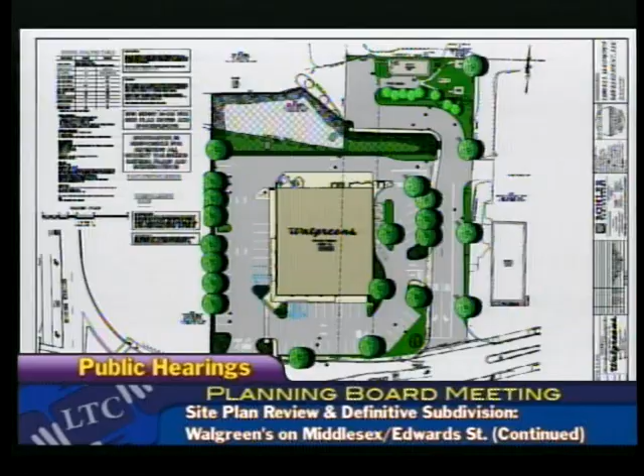Just to walk through some of the elements that Attorney Flood had pointed out: the building itself, the 14,800 square foot Walgreens, is located in the middle of the site. The drive-through is located to the east side right here. The front entrance to the building is located here.

Relocated Edward Street is here. You can make out the former limits of Edwards right through there. As mentioned, this parcel will include roughly 1.6 acres of land. There's 61 proposed parking spaces here.

The on-site improvements include providing loading facilities to the rear of the store. The parking surrounds the perimeter of the site, as you can see. We've provided ample interior and perimeter landscaping in accordance with the bylaw.

The driveways are proposed to be a right-in, right-out off of Middlesex here, and then two full movement driveways, one here at the intersection of the relocated Edwards. The site lighting will be shoebox-style downward directed fixtures to contain lighting on site.

The 35 Edward Street is to remain, located right here. Soccer field parking is located here, and the soccer fields would be just due north of the site there. To our west is state-owned land at Rourke Bridge. To our east is additional commercial development.

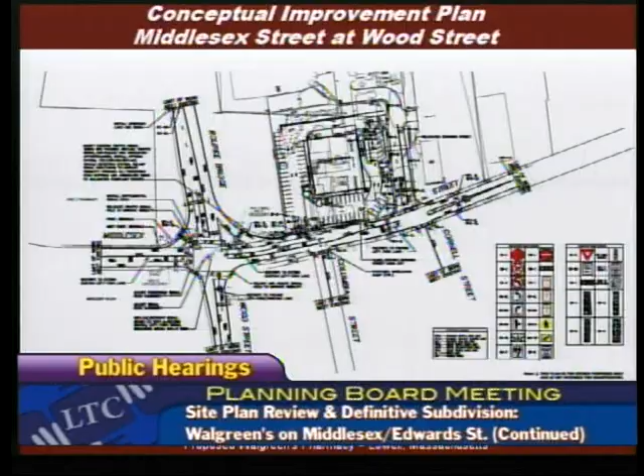Now we'll talk about the improvement plan. There have been a lot of changes made since the last time we were here, to address not only the questions and concerns that were raised, but also because we've since had the opportunity of a peer review done by the city traffic engineer as well as an outside review consultant. We've taken those comments and addressed them as part of the updated concept plan, looking at the site itself and how circulation works, specifically the access points of the property.

We spent a lot of time talking about the Middlesex Street driveway and how that would work, as well as the driveways on Edward Street, in particular the southernmost driveway that's closest to Middlesex Street. Part of the handout I have, the larger size plans I presented to you, will be a lot clearer than what's shown on the slide here.

On the first page of the larger set of plans, I've highlighted in yellow where the existing curb line is on Middlesex Street. The plans were difficult to read last time in terms of understanding where the widening was actually taking place, so I've highlighted the existing curb line, and right in the middle of that highlight you'll see a black line — that's the existing curb line.

In terms of the refinements we've made, we have extended the widening that was going to take place on Middlesex Street past the project site itself. So in the location closest to the Middlesex Street driveway, we're actually moving that curb line about 5 to 6 feet into the project site — it's a significant widening.

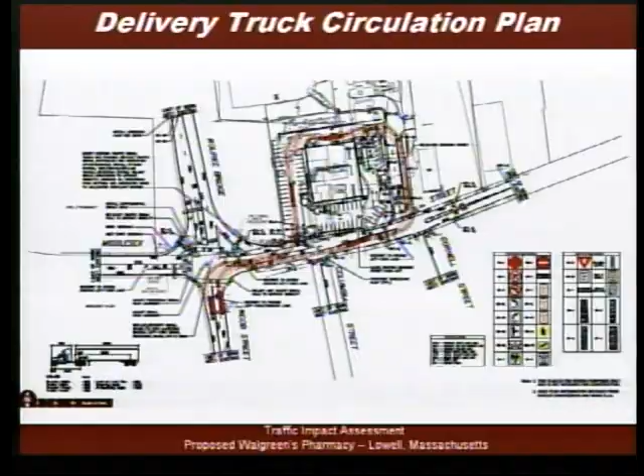For that truck to circulate within the site, it's going to be coming from Route 3, from Drum Hill, traveling up from Wood Street. It'll make a right turn at the intersection, shown on the second page in the larger set of slides. So the truck comes up Wood Street, makes a right-hand turn onto Middlesex Street, gets into the left turn pocket we're creating, turns left, goes down Edward Street, and comes into the back of the site at the northern driveway.

The truck will progress back past the back of the building and maneuvers into the loading dock area, then offloads pallets into the store. We've shown on the slide that the truck fits within the loading dock area. It does not impede circulation around the building, so the truck can be stopped here and offload product while you still have over 20 feet of traveled way behind the building.

The truck then proceeds around the building in a counterclockwise direction and needs to exit by way of this driveway. That large truck cannot circumnavigate the building, so it cannot come back out Edward Street—it needs to come out by way of the Middlesex Street driveway, then proceed back onto Middlesex Street. The truck will be coming at off-peak hours, a commitment we have as part of the project, so when it comes out it will get into the left turn lane and proceed south along Wood Street to get back onto Route 3A, Route 3. That is the only circulation pattern that works for the site in terms of that large tractor trailer truck.

Walgreens will not be using a smaller size delivery vehicle typical of urban areas. So that's one of the primary reasons why we need to maintain this access, because that's the only way that truck can actually get in and out of the site.

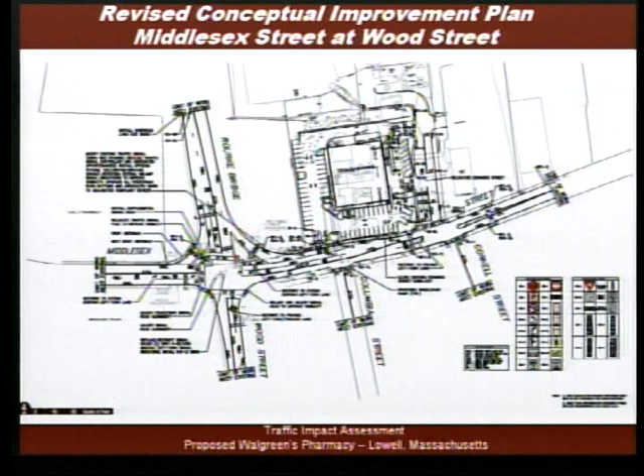So two things either have to happen. We either need to have discussions about reconciling that area so that land can physically be turned over to the city, since right now it's on private property, or we modify the concept plan to move that radius so it occurs within the public right-of-way, so we're not impeding on private property at that corner.

What you see on the last page is one direction we may take, which is physically moving that radius, making it a little smaller so it stays within the public right-of-way. What that does is shift Edward Street slightly over towards the project site.

We still maintain our two travel lanes. We would lose a little bit of parking in this area, but we can accomplish all of the requirements we may need to stay away from that corner.

We will be having discussions with that property owner to see if we can implement the plan that's here. This is much preferred if we're able to do that, but we do have an alternative plan to address the issue if need be.

We received some comments just tonight, actually just before the public hearing, some of which are questions I've responded to tonight regarding the Middlesex Street driveway - why we need it, and why it needs to be right in, right out.

The majority of the comments deal with some refinements of the site plan and the offsite improvements, which we'll be addressing between now and the next public hearing. Happy to answer any questions you have now or at the end of our presentation.

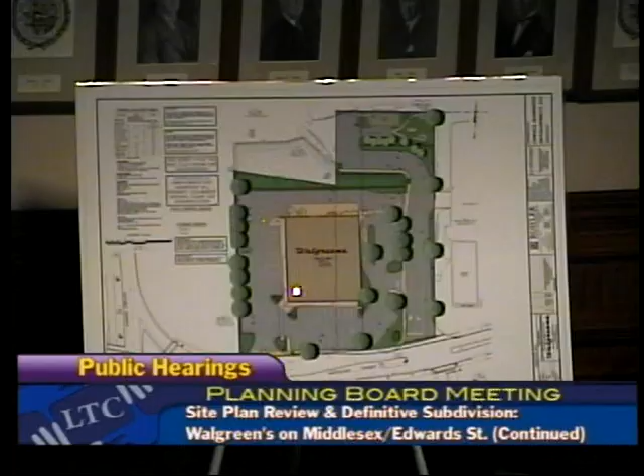Once it's made that maneuver, to make this turn coming around here, and then physically make a turn to either come out this driveway or this driveway, the rear wheels of that tractor trailer drive right over where this landscaping is here. It can't physically make the turns to make a hard right out of the project and then come down Middlesex Street by way of either one of these driveways.

So even if it was able to come by the building here, it cannot physically make the turn to get the trailer actually straight to be able to come out on Edward Street.

It's physically precluded. In order to do that, to make this turn, the truck would actually have to swing wide into the building area, which it physically can't do, or the driveway itself would have to be approximately 50 feet wide in order for that trailer not to drag. Then once it made the turn, it would have to swing wide over the center line and then come back to actually get in line to come out to the intersection here.

It's not physically possible. Did you entertain relocating that building on the site to make that work, or redesign the building in order to make that work? In terms of shifting the building in this direction here, in order to make enough room to be able to do that...

Even if we were able to do that, the trailer still cannot physically turn and get back out on Middlesex Street by way of any of these entrances here. The physical distance that the trailer would have to cover coming over here would drive right over the landscape islands.

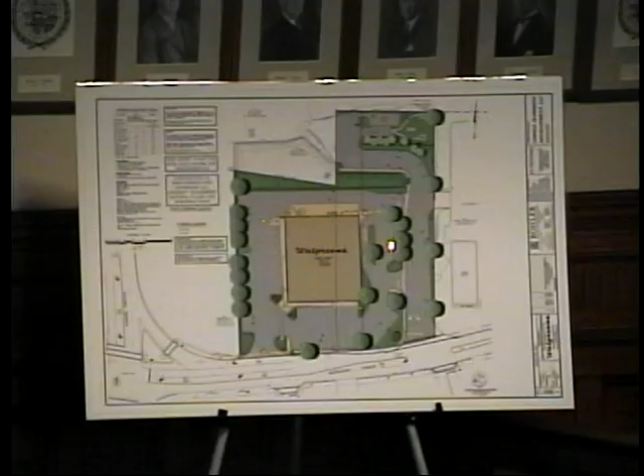If we pulled the building all the way over to the curb line here and still tried to have it come out, the driveways would have to be well in excess of 50 feet to keep the trailer on the correct side of the road.

Well, I suggest Walgreens get smaller delivery trucks, because that's going to be an issue.

CVS in Dracut on Broadway Road had a similar configuration. The intersection was designed exactly the same way, with a designated turn to the right, and they wanted to have a similar exit, and it didn't happen—they weren't allowed to have it.

That's a tough spot. I think you're looking at the same effects of almost a rotary type of effect as people coming out, and if they want to get on that Rourke Bridge, they're flying, and cars are queued in there waiting for the traffic to come up the Rourke Bridge. I think you've got a lot of potential conflicts at that particular site.

I think one of the residents commented on how you're going to get cut-through traffic even to exit and go up the Rourke Bridge, and I can see that happening. You're widening the road, and you're looking at a situation where cars are going to be picking up speed coming into that loop and come right up the Rourke Bridge. I see it all the time.

So I think you paid for an independent traffic study, and I believe they concluded that that was a problematic location to have an entrance and exit.

I think you tried to offer some solutions with the curbing, but that's not going to change the fact that you're proposing a major form of egress at, I think, a very dubious spot in the road. So at the pre-application hearing, I made that very clear.

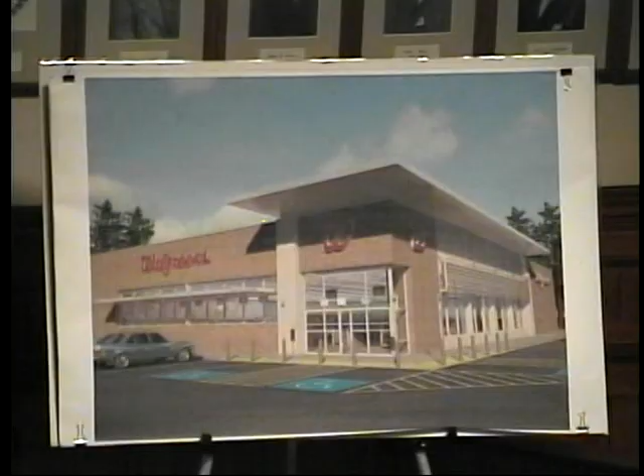If you could bring that photograph back up on the design. I have to say, I've seen some relatively attractive-looking Walgreens, and one of the speakers provided photos with clapboards and siding, and I believe in Tewksbury they might have one that fits that look. Again, this has almost a 1960s retro look to it, and it's certainly not, personally, what I think is fitting with the surrounding architecture, and we're looking to make an improvement with the area and how that's going to look.

Now, based on, and I'm sorry, it's Mr. Moser? Yes, correct. I believe you said there was some input from neighborhood meetings you had as far as design. Did you do anything to incorporate that? No, I mentioned in my presentation that none of that was incorporated yet. That we're waiting for input from the board, coupled with the community, and that evolution will occur, and it's a matter of satisfying the board, satisfying the community folks, and also Walgreens. So it's a balance I'm sure I can reach.

Sure. Yeah, I again, personally, would scrap this design completely. Kind of heard that before. Yeah. I think it wouldn't take much difficulty in forming some sort of consensus on that.

But I think there are some fine examples of Walgreens facilities that have gone up, and we don't consider ourselves a second-class community, nor do we consider this a second-class neighborhood. I think we want to see the same type of design incorporated into the site. I'll be honest with you, based on what's in front of me tonight, mainly that right-in, right-out -- I made that very clear even before, and I think we have supporting findings on that. That has to be looked at with a great deal of sharpening the pencil as much as you can, because there's no way I can even talk about other parts of this proposal without that being addressed. So, thank you, Mr. Chairman.

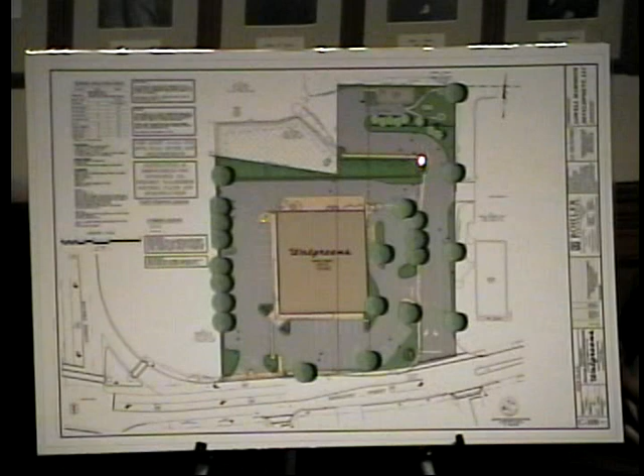So you have 2 lanes heading southbound towards Middlesex Street, 1 lane heading northbound towards the fields. Okay. The widening of that street, there's a conflict in the documentation and the prints that we were provided, the larger size prints. One set of documentation said it went to 36 feet, and I think the drawing said it went to 38. That's correct, yes, and that obviously has to be addressed.

The 38 feet gives us the ability to provide a shoulder in the area, and so that's what we were trying to accomplish. 36 feet gives us basically 3 12-foot travel lanes. So what we wanted to do is, the additional shoulder area gives us the room for the pedestrian and bicycle accommodations that we heard are important, not just for our site, but also for the playing fields.

Okay, I do think also that the architecture of the building has to be looked at. There's enough concern within the neighborhood there to address that. I look on this project as it could be a catalyst for further development, and it could clean the area up. There are some other things going on over there too. But I think the architecture, the proper amenities there could really add to the project and add to the neighborhood.

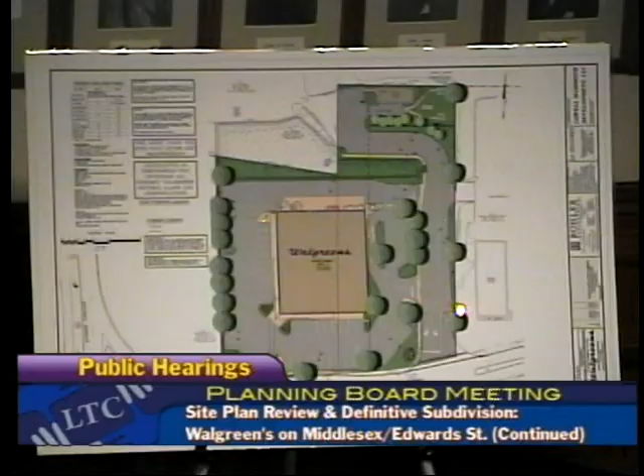We can look at it. I don't think it can make the turns that are required to get back here and then get into position. Because as of now, which way do you have them enter? Right now, we've got them coming in this back entrance, and then they get into the Edwards Street loading area.

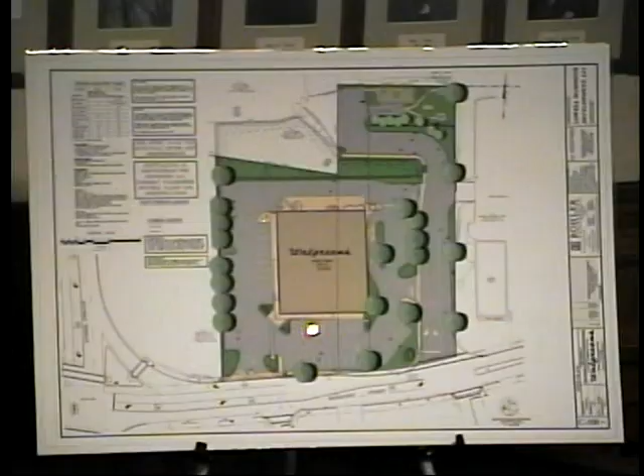So they're coming in this direction, but you want them to go out? And then they come around the building here and come out this entrance. The truck can probably make this turn, but the issue is the quick right, and then another quick right. As you imagine, the rear wheels of the trailer are trying to swing around. For that to happen, it would need some of the suggestions I've had in looking at the building, to get more room so it can swing wide and make those turns.

Gentlemen, if I can just interject a point here. My name is Jeff Kaufman, I own Kaufman Realty. My son Michael came before you folks a couple months ago as a preliminary meeting, and everybody was talking about this right turn out on Middlesex. We clearly got the message from this board that they don't want to see that right turn out there. We went to our tenant Walgreens -- and Walgreens for us drives the bus. They said to us emphatically, without that right turn out on Middlesex, they will not do this deal.

Our goal is to work with you, the planning board members, the city of Lowell, their peer traffic engineer Jeff Dirk, and our engineers to develop this site. I think we've committed $300,000 to improvements at the Middlesex Wood Street intersection. I heard a few minutes ago that overall, with the Walgreens development, that intersection -- which I clearly understand how bad it is, how many accidents there are -- is going to be improved.